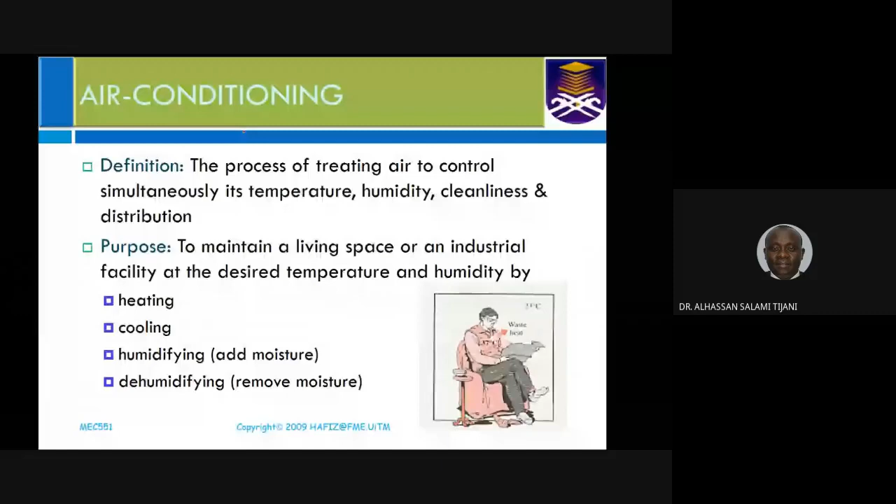Okay, so in air conditioning, what is the definition for air conditioning? We all know in our normal daily activities, sometimes when the weather is too hot, we try to sit in an environment where the temperature is in very good condition. So moderate temperature, and then the humidity, the air distribution is good.

Okay, so classically, air conditioning is the treatment of air in order to simultaneously control the temperature of the air. Means if the temperature of the air is too much, we need to bring it to a comfort level. And then the humidity also, and then the cleanliness, and then the distribution finally.

Okay, so there are four main purposes of air conditioning. One of which is the heating process. One of the main purposes of air conditioning is for the heating process. And then we also have cooling process. I will go into details about these particular areas. And we have also humidification and dehumidification. So these are generally the four areas used in any air conditioning application.

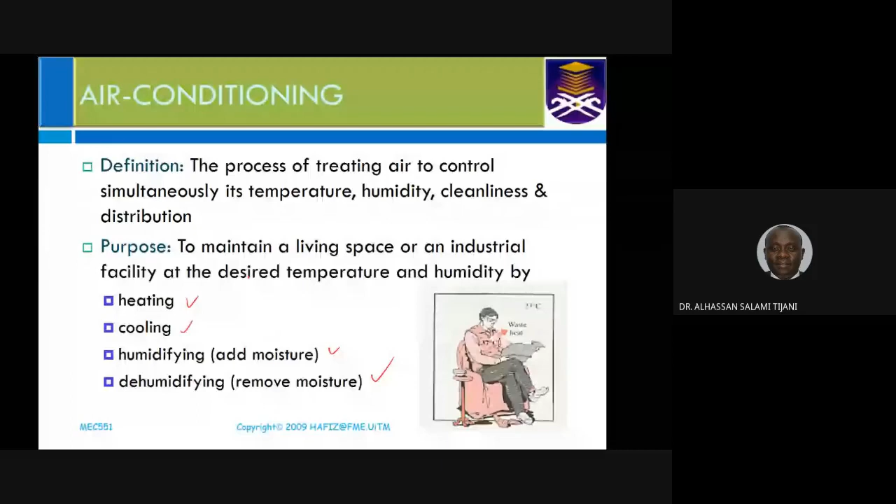Okay, so in which areas is air conditioning mostly needed? In offices, residential areas, in your rooms, hospitals, even in classrooms, the air conditioning application is widely used. In the automobile industry, in the aircraft, air conditioning is also very, very important.

Okay, so now air conditioning is meant to provide comfort zone. When we say comfort zone, a temperature which is not too cold or too hot. So a comfort temperature, and there are three main factors that the comfort of a human body, or the comfort zone, depends on. And these three factors are the temperature, humidity, and then air motion.

If the temperature is extremely high, you will not feel comfortable. You will feel discomfort. So you tend to sit in an area where the weather is cold. You understand me? Also, if the temperature is too cold, maybe 10 degrees Celsius, 11 degrees Celsius, or even minus degrees, then you will not feel comfortable. So the comfort level for any human being, as far as temperature is concerned, is given by this.

Also, the relative humidity is supposed to be between 40 and 60%. And we have the air motion or the airflow, the velocity of the air. There should always be ventilation. If you find yourself in a room where the window is closed, no fresh air coming in, again, you will not feel comfortable. You understand me? So other factors: air cleanliness, the odor, radiation, and so on and so forth.

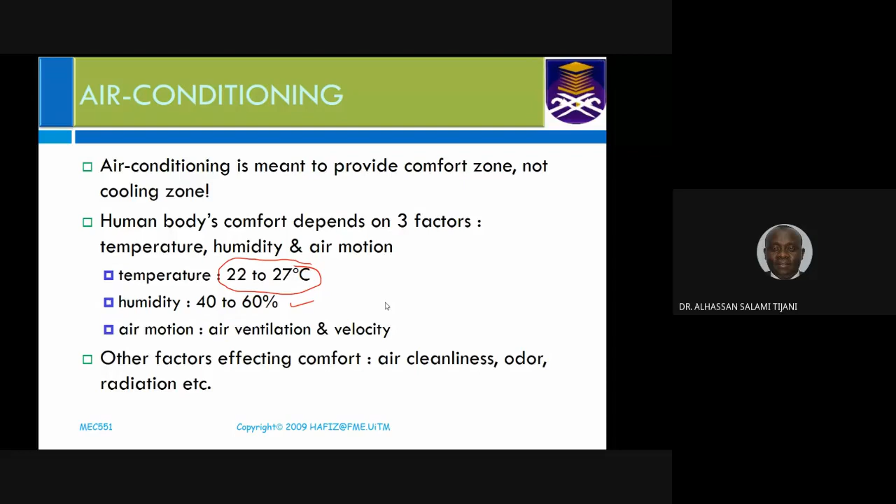Okay, so now let us look at atmospheric air. When we say atmospheric air, typically air consists of so many components: nitrogen, oxygen, and small amounts of other gases. We will not go into these chemical details. So now air in the atmosphere normally contains some water vapor. You see, if you take any sample of atmospheric air, that sample will contain some amount of water vapor. You understand me? Okay, so air that contains no water vapor is called dry air.

So basically, atmospheric air consists of two main components. We have the dry air component, and then we have the water vapor. These are the two main components of atmospheric air. As far as our thermal engineering is concerned, we are not interested in the nitrogen, oxygen, or whatever constituent. We are only interested in the dry part of the air and then the water vapor. Okay.

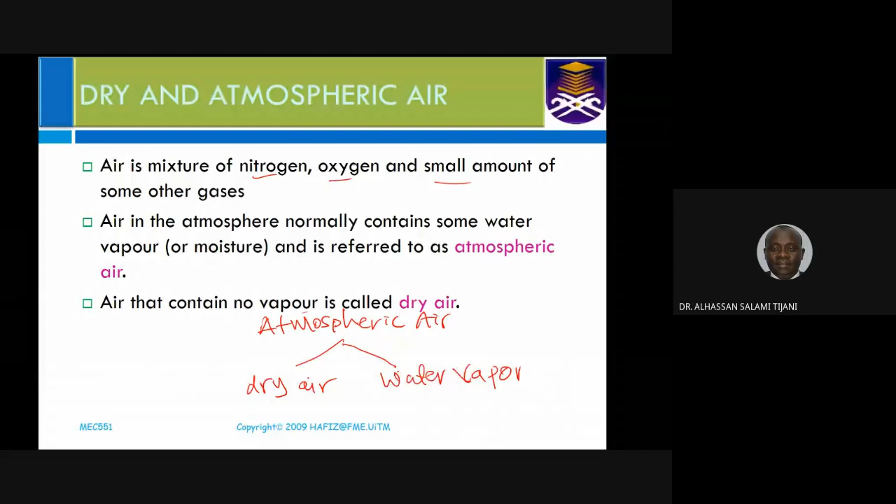So now the temperature of air in air conditioning application ranges between -10 and 50 degrees Celsius. Somebody will say, why -10? I'm saying the application is -10 to 50 degrees Celsius. So -10 is extremely cold. Okay, so here, when we say air conditioning application, we are also referring to the refrigeration cycle. We are not referring to the comfort level of human beings.

The comfort level of any human being with respect to temperature should be between 22 and, let's say, 27 degrees Celsius. But widely speaking, in air conditioning application the temperature ranges between -10 and 50. So -10 because maybe you are working in a pharmaceutical industry, and they need to preserve certain drugs at a very low temperature. So air conditioning application will be needed over there too.

Or let's say you are working in a textile industry where you produce clothing, shirts, and other things. In the textile industry, when they pack the clothing in the warehouse, they need to raise the temperature in that room a little above the ambient temperature so that animals, creatures, insects will not attack and destroy the materials. So air conditioning application has a very wide range in terms of temperature. But the comfort level for human beings is between 22 and 27 degrees Celsius.

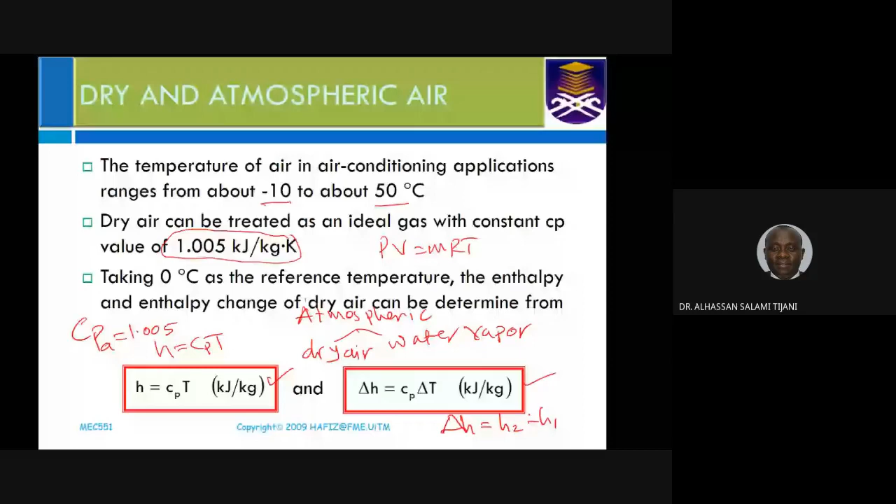And now we are saying at 50 degrees Celsius, the saturation pressure of water is 12.3 kPa. Now let us refresh our mind. What do we mean by saturation pressure? Saturation pressure is the pressure at which a fluid will start changing its phase, either from liquid to vapor, or vapor into liquid. So for example, let's say I have a PV diagram like this, a PV diagram for water. I hope you have not forgotten this from your thermodynamics.

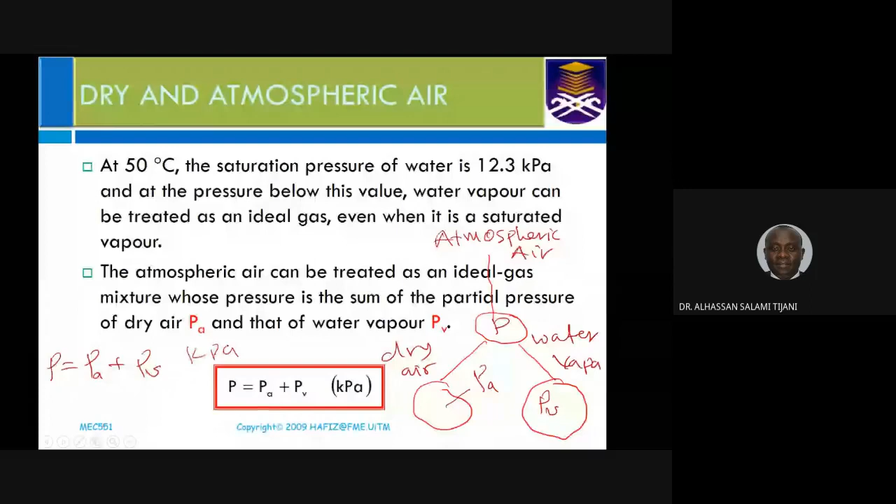You understand? So like this. Yes, so we have the water vapor component, and again, the unit is in kilopascal. So from today, you should know that atmospheric air consists of two main components, partial pressure for dry air and partial pressure for water vapor. Now the enthalpy: since we have assumed that both dry air and water vapor are ideal gases, the enthalpy of water vapor in air can be taken to be equal to the enthalpy of saturated vapor at the given temperature. So HV equals Hg at the given temperature.

Okay, for example, assume the temperature in my room is 23 degrees Celsius. If I ask you to determine the enthalpy of the water vapor that is present in my room, then that corresponds to HV equals Hg at the given temperature, which is 23 degrees Celsius, like this. So, yes, 23 degrees Celsius.

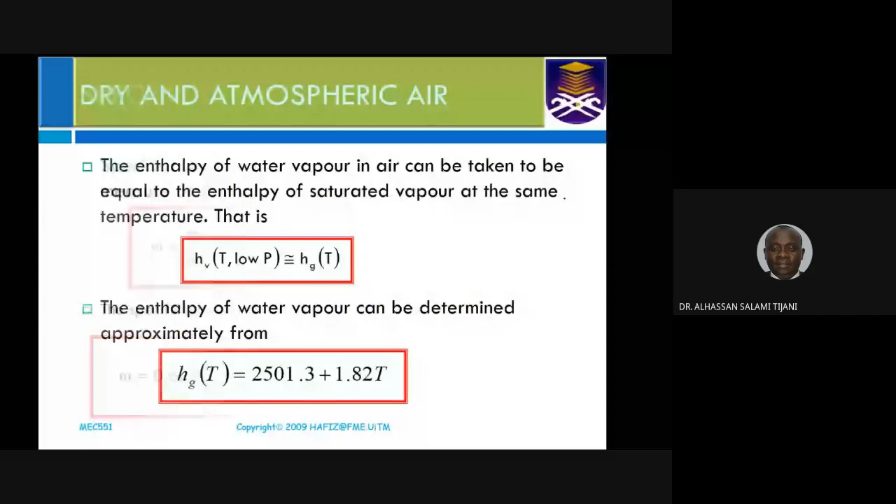1.82 T. Okay, so anytime you want to find the enthalpy of the water vapor present in the air, you can use this equation or you can use the property table. We'll try both methods and see. Now, let us look at some classical definitions. Now, let's look at specific enthalpy. When we say specific enthalpy, what do we mean by that?

You see, if I have a sample of atmospheric air, if you really understand this concept, then the air conditioning questions will be very, very easy for you. Okay, assuming we have a sample of atmospheric air in which we have the dry air component, and then the water vapor. So this is dry air. Yes, so this is the dry air component, and this is the water vapor.

Okay, so assuming the mass of dry air is given by ma, and the mass of water vapor present in the air is given by mv. That's the mass of water vapor that is present in this atmospheric air. Okay, so this is atmospheric air. And we have separated it into two, dry air component, and then we have the water vapor.

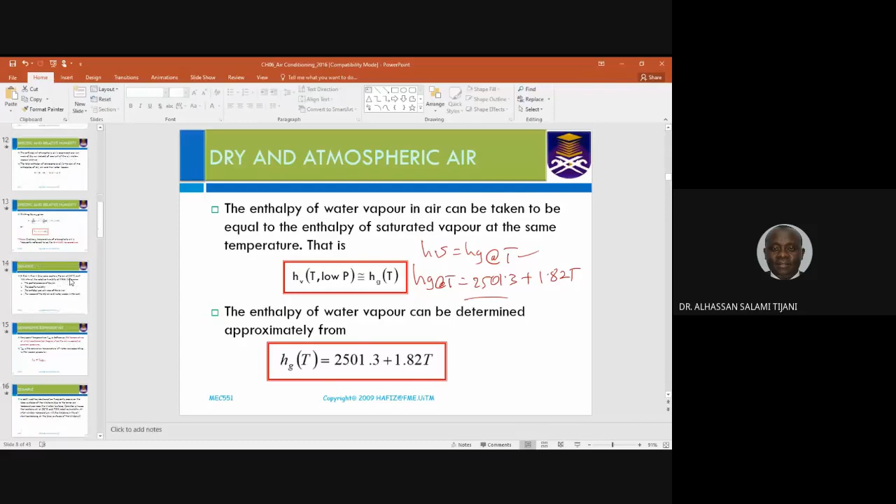If you take any sample of atmospheric air, then you extract the water vapor from it. If you find the mass of the water vapor, and then you divide by the mass of the dry air component, that gives us what we call the specific humidity. And specific humidity can also be expressed in this form. So maybe we can, let's see over here. Let's see. Okay.

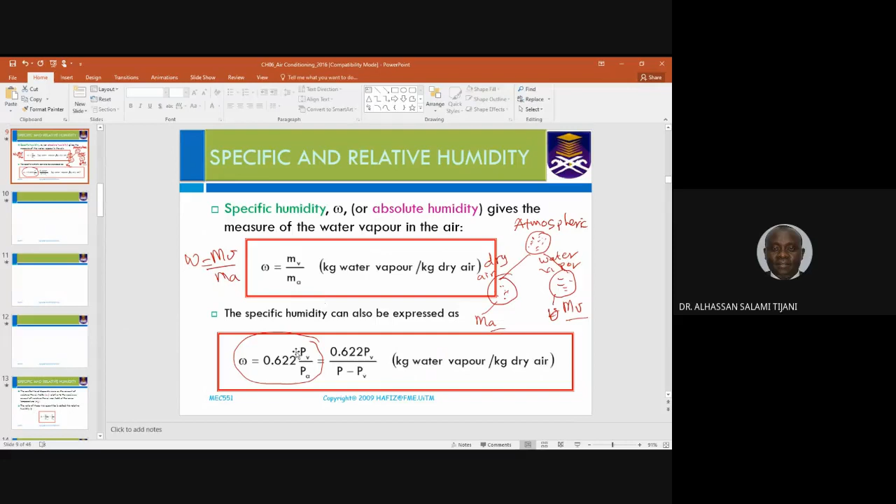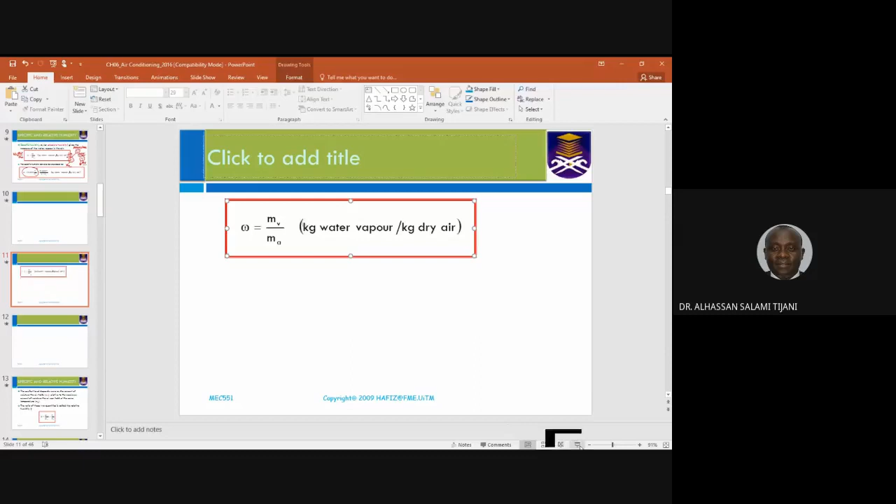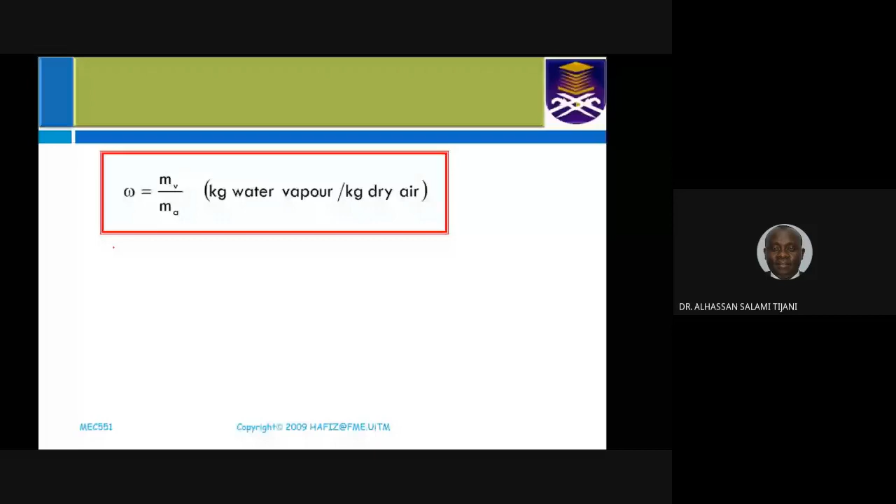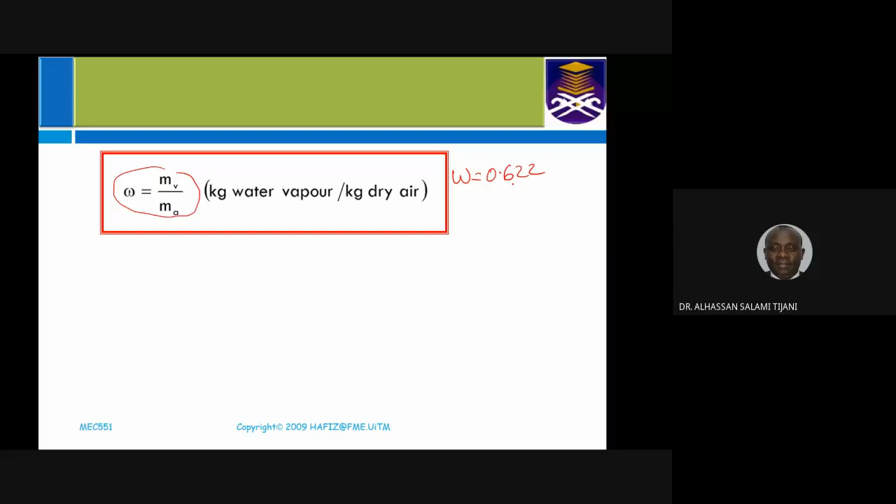Yes, so now let us continue the derivation. Okay, we have defined that specific humidity is given by this. Now, we have also mentioned that this omega can be also written as 0.622 Pv divided by P minus Pv. Okay, so let's see. Now, from ideal gas, we have Pv V equals to mv Rv times temperature.

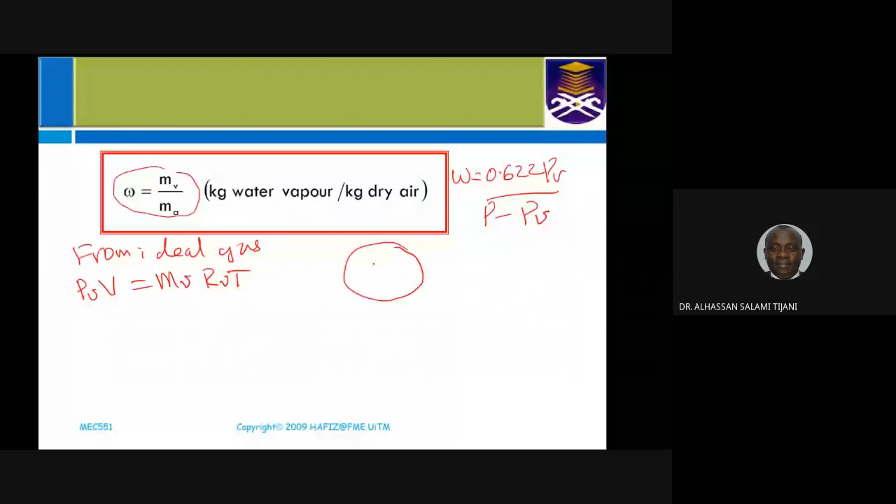Okay, assuming we have a certain sample of atmospheric air, and this atmospheric air has a certain mass mv and a certain mass ma. Since both fluids are ideal gases, we can express them in terms of this. Now the total volume of the system is given by V. So the volume occupied by the dry air is the same as the volume occupied by the water vapor. So the V remains the same. Similarly, the temperature of both is going to be the same.

Because if you are sitting in your room now and you have a thermometer with you, the thermometer will be reading maybe 22 degrees Celsius. This 22 degrees Celsius is for both the dry air component and the water vapor. Okay, so temperature remains the same. The volume remains the same, but the masses will be different.

You understand? And then the pressure exerted by the water vapor is given by Pv. Pressure exerted by the dry air component is Pa. So now the ideal gas equation for the dry air is given by Pa V equals to ma times Ra times temperature. You know, this R is the ideal gas constant.

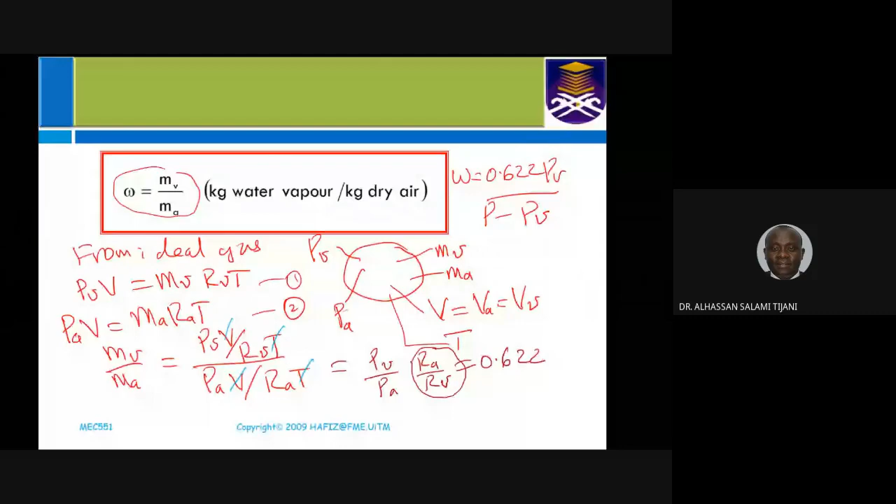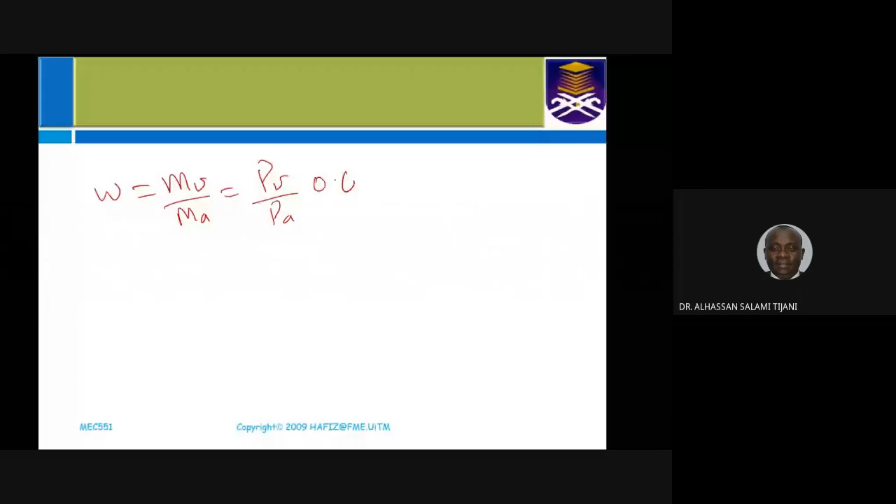So that's why we say the specific humidity, omega, equals MV divided by MA. This equals PV divided by PA times 0.622. But we know that the total pressure present in the air equals PA plus PV.

So now if I'm looking for PV, PV equals P minus PA. Or if I want to express PA, PA equals P minus PV. So it means omega can be expressed in terms of PV divided by P minus PV times 0.622. So this is the derivation for that equation.

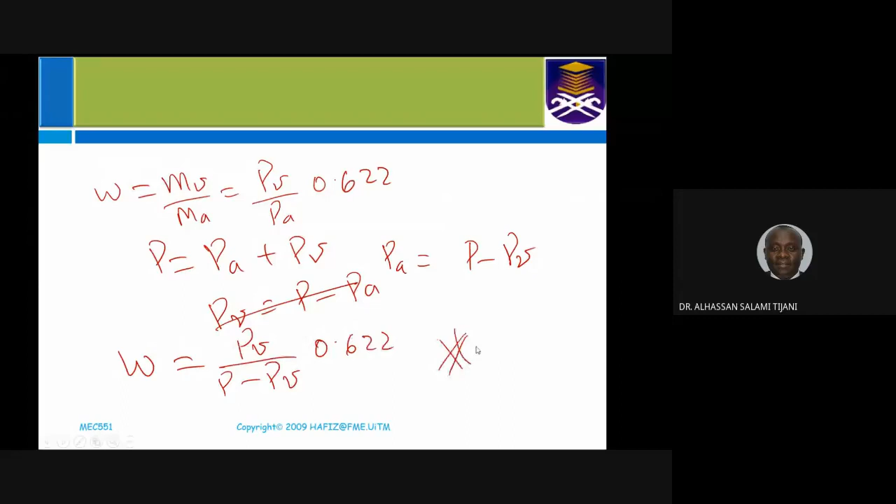Yes, derivation for this equation, that's the specific humidity. So that's the derivation for this particular equation. Okay, so now let us move on.

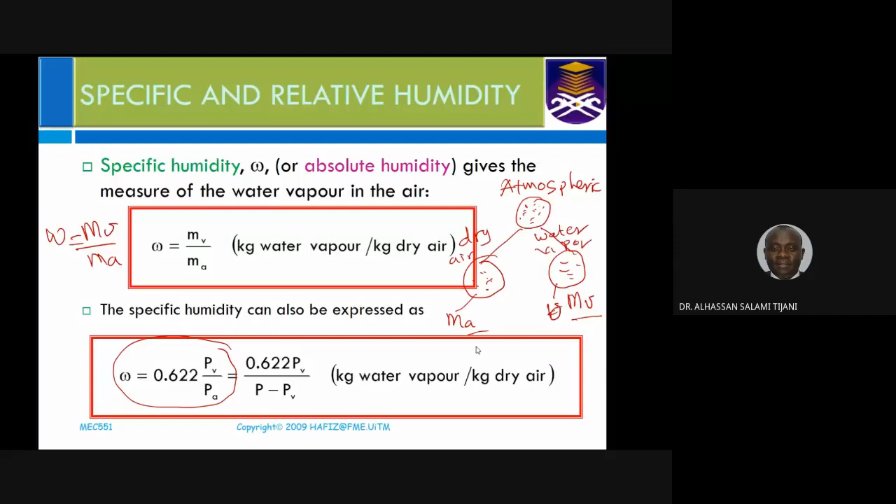Now we come to relative humidity. Now that we know specific humidity, let us look at the definition for relative humidity. Relative humidity is defined in a similar fashion. So let's say again, if I have a sample of atmospheric air.

This atmospheric air can again be split into two: the dry air component and the water vapor. Assuming we have a sample of atmospheric air like this, in which the pressure exerted by the water is given by this, and the pressure exerted by the dry air is this. So this is the sample of atmospheric air.

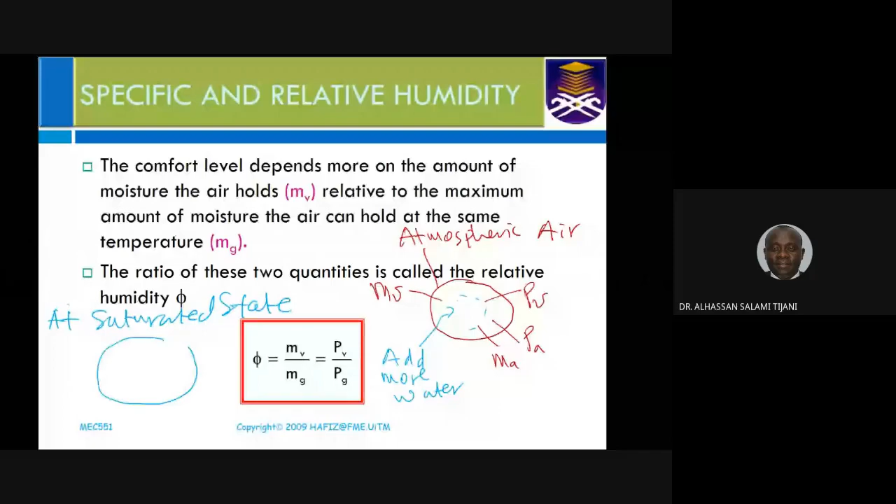So at a saturated state, we'll have a situation where this MV changes to mg, and the PV also changes to PG, because that's the saturation pressure. But MA and PA remain the same, because the mass of dry air and the pressure for the dry air component do not change.

So at the saturated state, the ratio of the mass of the moisture present at the initial state, this MV, divided by the mass at the saturated state.

This is what we call relative humidity. It can also be expressed in terms of its pressure, the partial pressure of the water vapor divided by the partial pressure at the saturated state. This is very, very important for you to know.

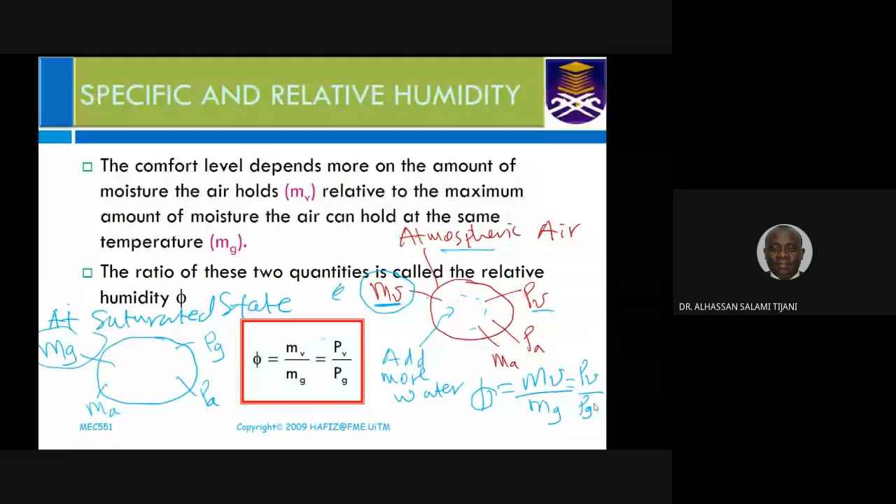Where the saturation pressure, PG, is given by P saturation at a given temperature. So now we have two important equations: omega is given by MV divided by MA, and phi, the relative humidity, is the ratio of the amount of water vapor present in a sample of air divided by the maximum amount of water the air can hold.

It can also be expressed in terms of the pressure like this. Consequently, we can derive other related equations for omega and phi. We will not go into the derivation, you just need to know them.

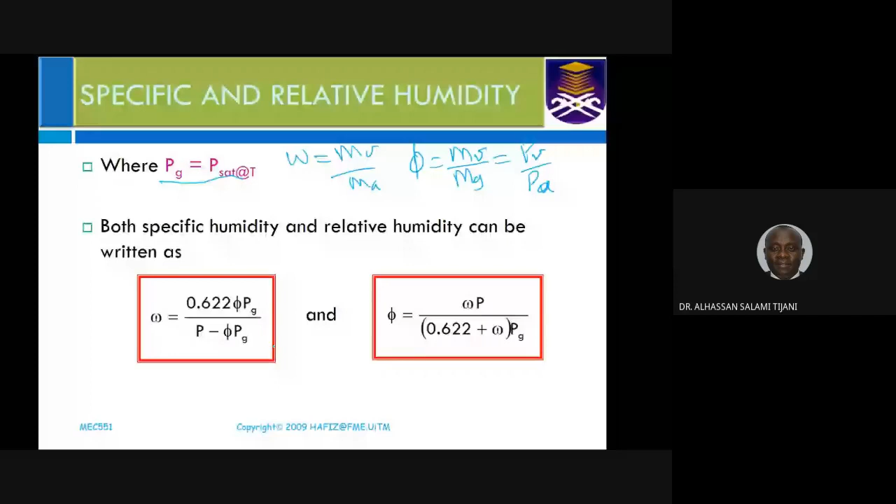Now let us see the enthalpy of atmospheric air can be expressed as the sum of the enthalpy of the dry air component plus the enthalpy of the water vapor. So enthalpy for atmospheric air can be divided into two: enthalpy for the dry air component, and enthalpy for the water vapor. Now we can express it like this.

The specific enthalpy is absolute enthalpy divided by mass. Similarly, specific volume is given by absolute volume per unit mass. This is not a new thing, this is a recap of what you did in your thermodynamics.

Now we can express these two equations like this, defining the enthalpy. So the enthalpy for the dry air component is the absolute enthalpy divided by mass of dry air. So we can say absolute enthalpy equals HA times MA. Similarly, HV equals HV times MV.

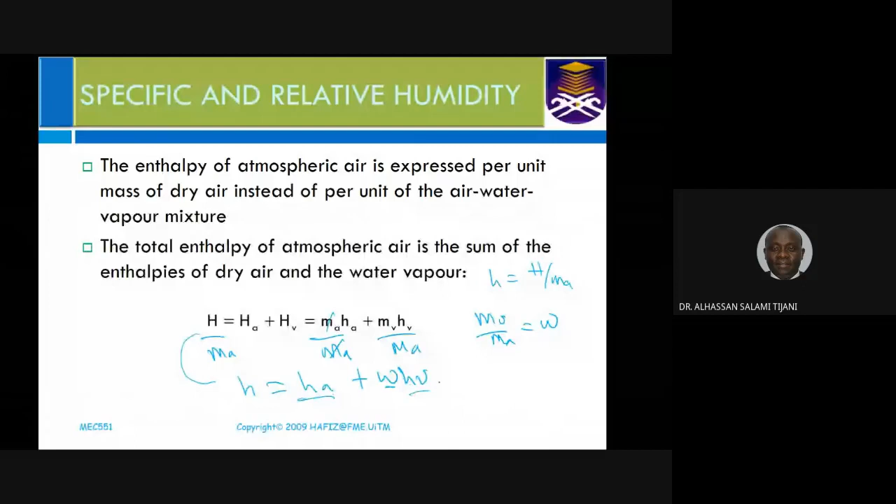So anytime we are interested in determining the enthalpy of atmospheric air, whenever they ask you to determine the enthalpy of atmospheric air, this is the equation you should use: enthalpy of atmospheric air consists of the enthalpy of the dry air, plus the specific humidity times the enthalpy of the water vapor. This is very, very important. This is the equation which we have just derived.

Later I will come to this particular equation. We will discuss these questions later on.

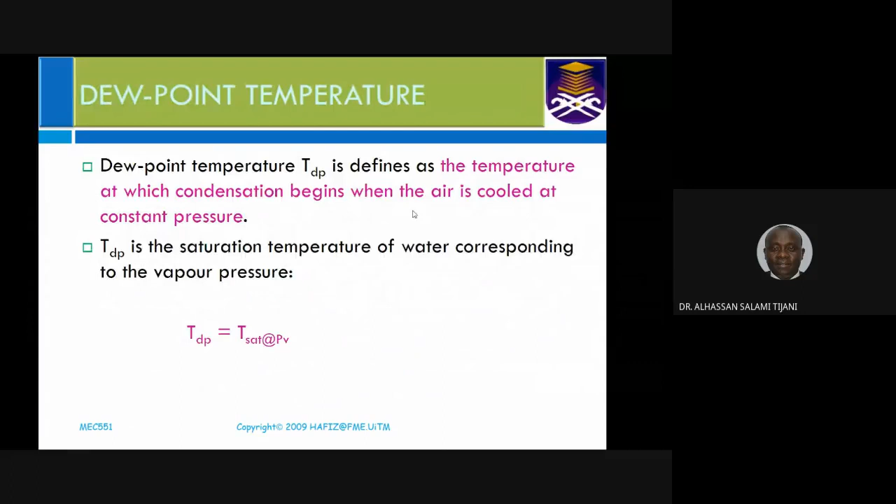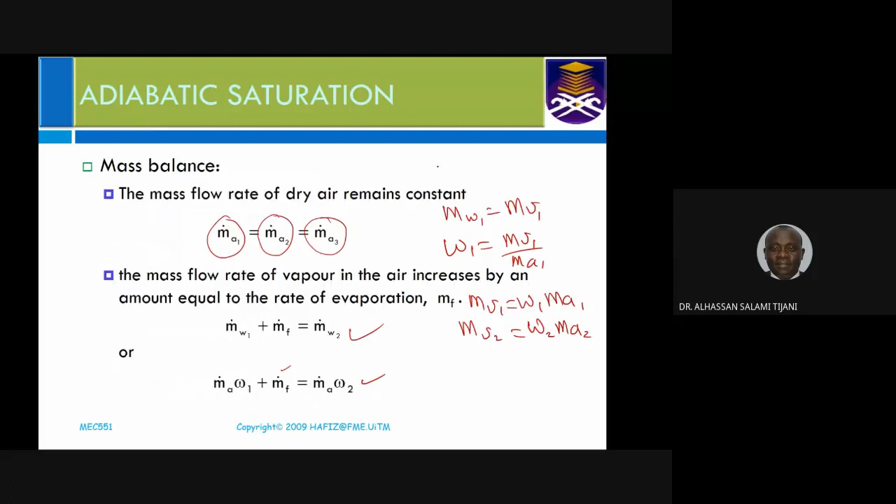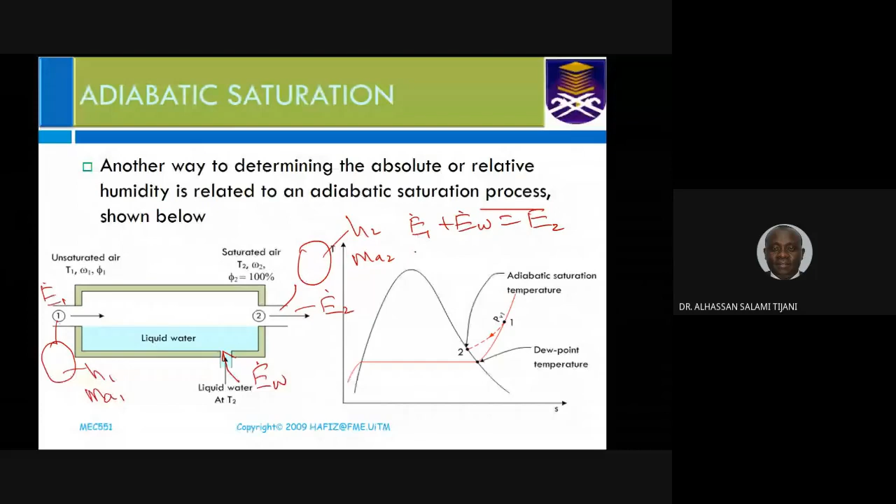So now we need to define this E1 and E2. E1 is nothing but the mass of the dry air times the enthalpy of the dry air, that's what we have over here. Plus, again, MF we know already, times HF. And then this should be equal to the whole of this.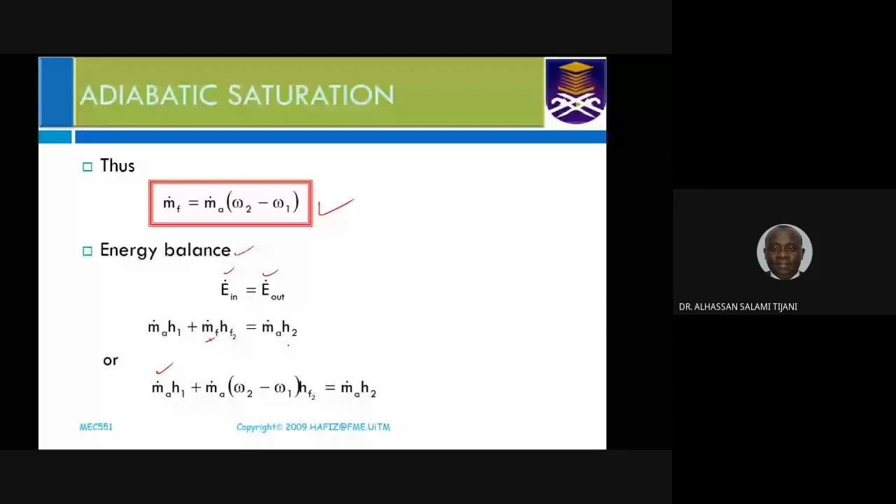So now, if we rearrange the equation, we can express it in terms of this, or in terms of this, or in terms of omega 1 and omega 2. I'm not going to derive all this, it would be a waste of time.

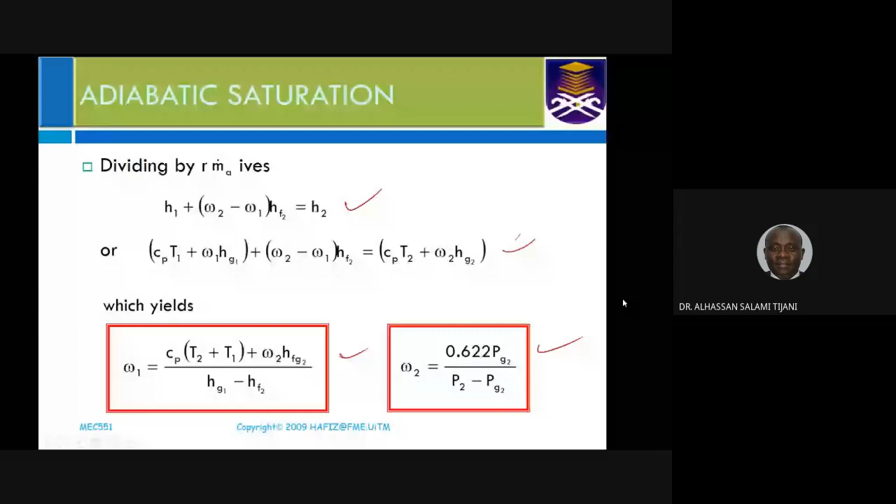Okay, so in air conditioning applications, there are two types of temperatures. We have the dry bulb temperature and the wet bulb temperature. The dry bulb temperature is the temperature read by an ordinary thermometer in your house.

On the other hand, the wet bulb temperature is read from a wet bulb thermometer, which is an ordinary liquid-in-glass thermometer whose bulb is enclosed by a wick moistened with water. So you see over here, these are the two common types of thermometers. We have the wet bulb thermometer; here there is a wick bounded by this particular tube.

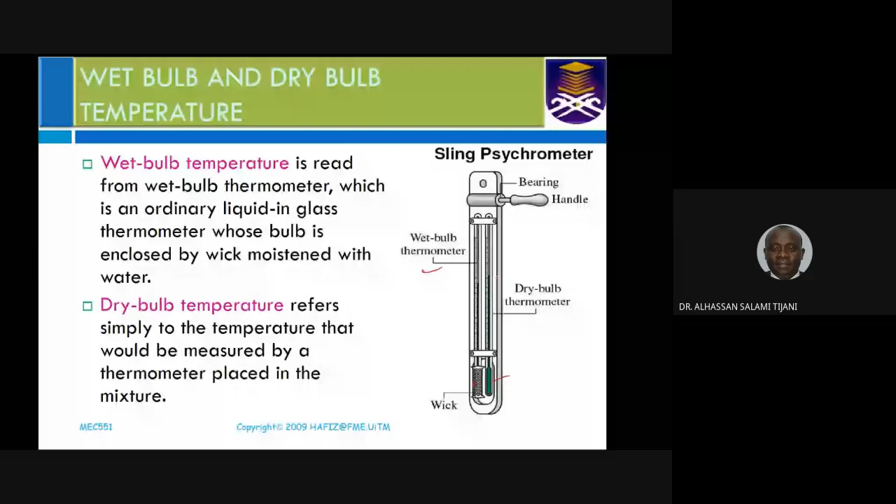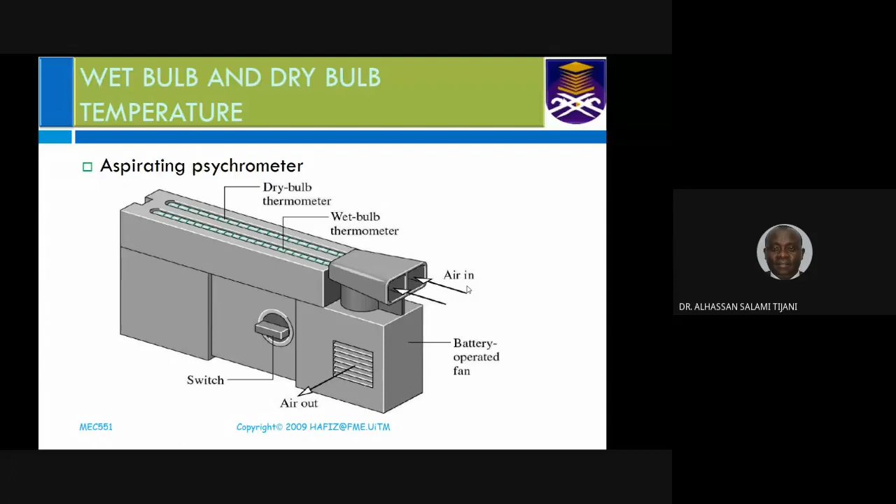And this is the dry bulb temperature. The temperature read by the dry bulb thermometer is always higher than the wet bulb temperature. This is another device used to measure the temperature, called the aspirating psychrometer. We will come to these questions later on.

Now, the next very important area is the psychrometric chart, which we will be using in air conditioning applications. It is a chart designed to determine the properties of atmospheric air.

Now it has a vertical axis, called the specific humidity axis, that is the omega axis. You see over here, the humidity ratio, or specific humidity, is given by this. And then we have the dry bulb temperature. This is the dry bulb temperature.

Apart from this, we also have the enthalpy of atmospheric air, given by these lines. And we have relative humidity. 100% relative humidity belongs to this particular line, and it continues to decrease: 100, 90, 80, 70, and so on. These are lines of constant relative humidity.

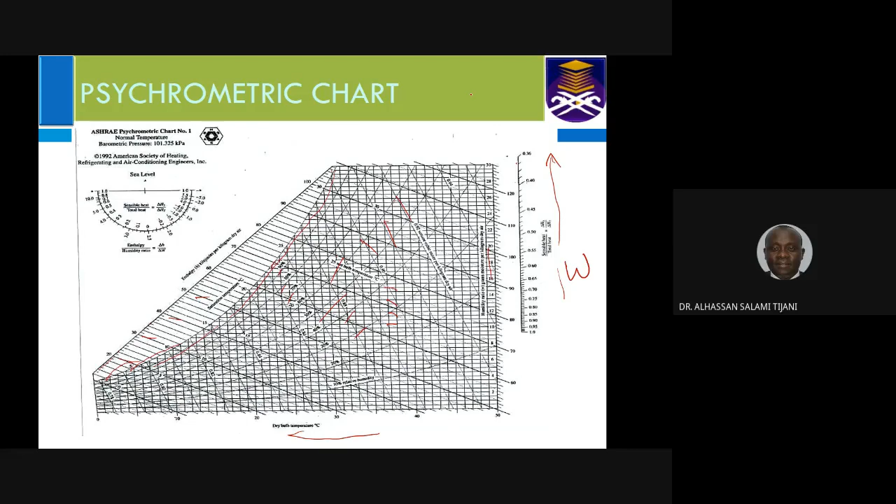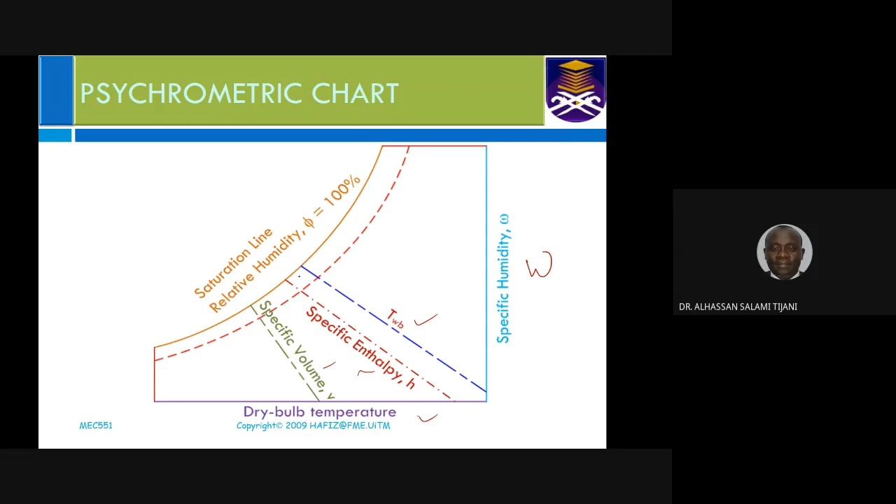And then we also have the wet bulb temperature, like this, and the specific volume of the atmospheric air, given by this. Later when you start looking at questions, you will see. So in summary: specific humidity omega on the vertical axis, dry bulb temperature, wet bulb temperature, enthalpy, specific volume, and relative humidity given by this.

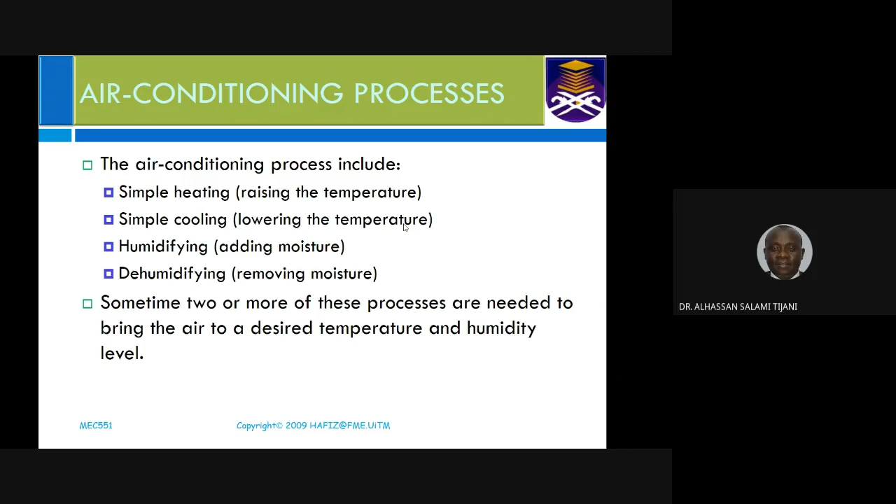Now, in air conditioning applications, as I've told you, we have simple heating, simple cooling, humidification, and dehumidification. So now we're going to look at these areas. In various air conditioning applications, we normally refer to the psychrometric chart, which can simply be drawn like this. This is the dry bulb temperature, this is omega, and then the relative humidity is given by this.

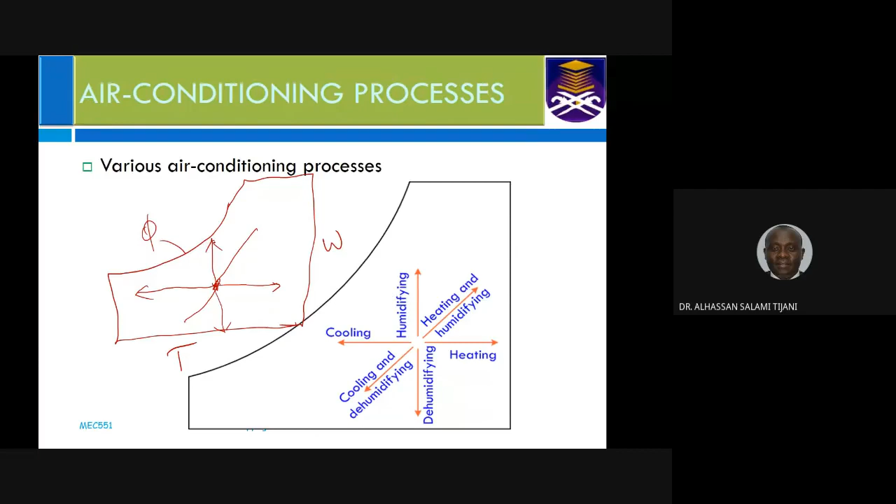Whenever we have a heating situation, temperature is increasing from this reference point, and this is called simple heating. For cooling, temperature is reducing, referred to as simple cooling. If we have humidification, we are adding only moisture to the atmospheric air. If we remove the moisture, we have dehumidification. Here we can have heating and humidification, and cooling and dehumidification this way. These are the various processes describing air conditioning applications.

Now, in simple heating, we normally have a heater embedded in the air conditioning duct. Let's say we have a very long duct, and in the middle we put a heater. What is the job of the heater? To transfer some amount of heat, in other words, to raise the temperature of the air. So at the exit, what happens to the fluid? Let me draw the psychrometric chart for this.

If you draw the psychrometric chart for this simple heating, like this. So let's say this is state 1 of our fluid. So for simple heating, it means it goes horizontal. Temperature, this is dry bulb temperature, this is omega. Now this will be state 2.

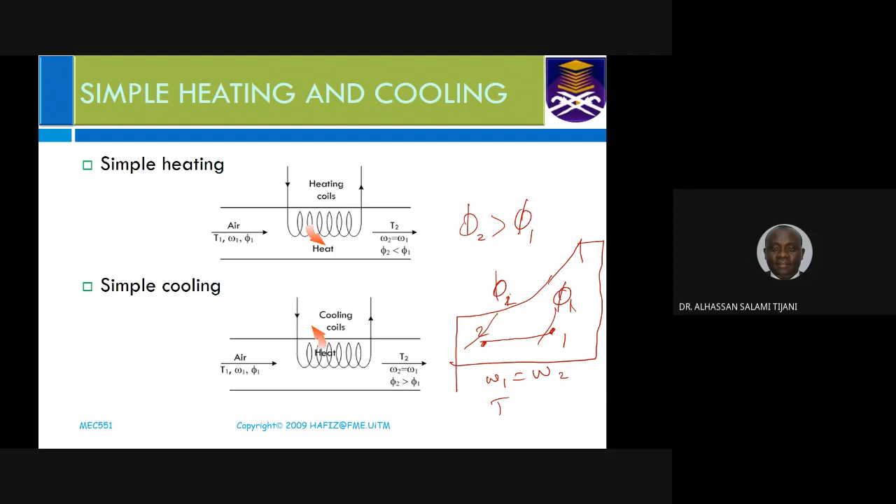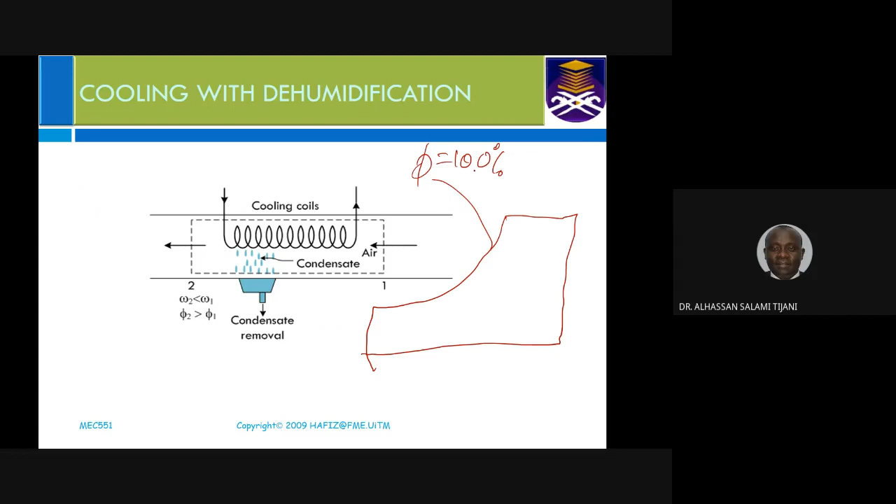Okay, so in simple cooling with dehumidification, also we will have a situation like this. All right. So I have told you that this line corresponds to 100% relative humidity. 100% relative humidity means the dew has started forming. So let's say we have the air conditioned air at this state, let me change the color.

So initially the air is at state 1. Now it enters this air conditioned duct. Cooling means that we are removing the heat. Temperature is reducing, means Q out. So it will move to the left. It continues to move until eventually it touches this line.

And on this line, it means that there will be condensation taking place. So this is the condensation, because of 100% relative humidity. So continue to cool down, the temperature will reduce to a particular state. So this will be state 1. And then final state, let's say this is state 2. So the temperature is decreasing. There will be moisture due to condensation.

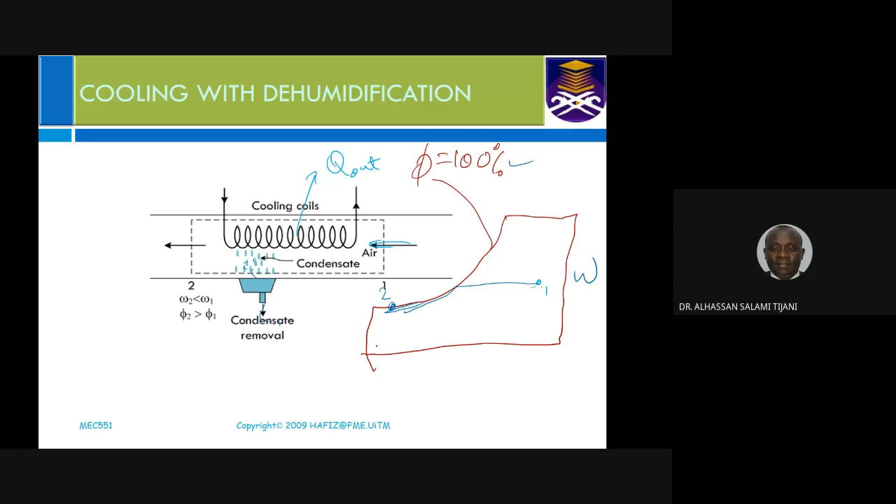So then these parameters: omega 1 is greater than omega 2. See, this is the line for omega. Omega 1 is greater than omega 2, this is state 2. And similarly, phi 2 is greater than phi 1. These are the important things we need to know related to this.

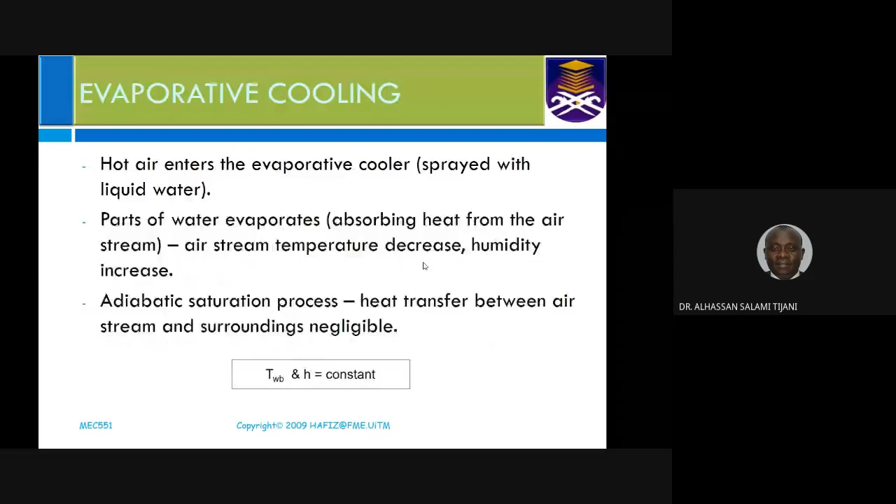Okay, so let me see. I will stop over here. In the next class, I'll discuss the adiabatic mixing of airstreams, and then the rest of the class will be solving questions. So let me know if there is any question.